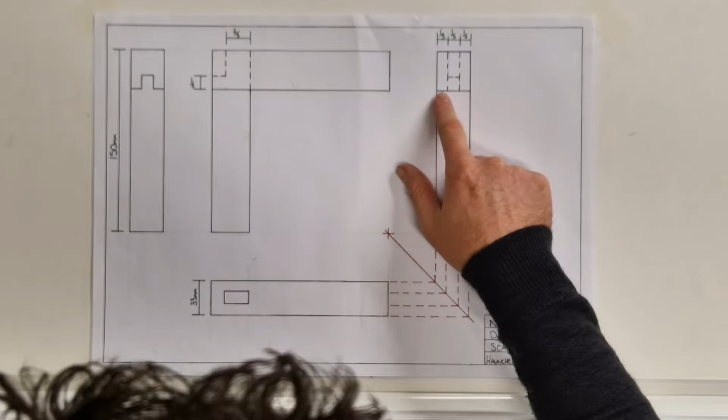So this video is going to be a demonstration on a haunched mortise and tenon. The principles are nearly the same for a haunched mortise and tenon as a standard mortise and tenon, where you usually divide by 3, or you go to the width of your chisel. However, a haunched mortise and tenon is designed for a corner of a joint, i.e. the corner of a door, the corner of a sash window or a box casement window.

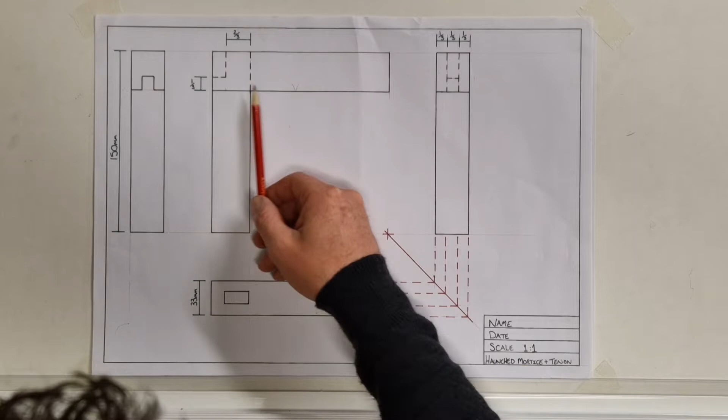So for example, if we just said that this was the corner of a door, then that would be the piece of timber for the door. You'd have a groove usually run out in here, and then the haunch there would usually be the size of the groove, if you're machining. So

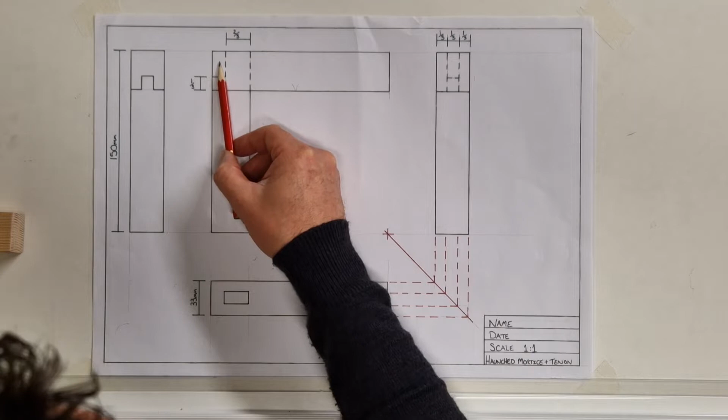the design behind the haunch is the fact that you've got a full tenon coming through for gluing and strength, but then you've also got a small haunch there, which gives you a bit more material on the end to stop it just falling out. So I'll show you how to draw this. For this one, we'll start 20 millimeters in and 20 millimeters down, and we'll make a cross there.

We'll strike a line quite far across on this one because we have to do multiple pieces. So we need to come 33 millimeters this way. And we'll come 150 millimeters down for the joint. And we'll put a mark just there. I'm going to strike a line again, faint, all the way across that board.

What I'm going to do then is come across 30 millimeters, and this is going to be the start of my corner joint, and then that's going to be 44 millimeters in width that way. Again, I'm going to do all this faint for now, and then we'll add it all back in at a later date. So we're going to come across, because our joint size is 150. So all we're going to do first of all is our boxes, and then we'll add everything in afterwards. So we'll come down 44, we'll create a mark, and I'm going to strike another faint line across the top of that one as well.

So again, like in your mortise and tenon, we're going to come 10 millimeters off the one shoulder, 10 millimeters off the other shoulder, which gives us a 13 millimeter tenon. So that's that. And then next, the layout of this joint, where you always use the rationale of divide by 3. So 44 divided by 3 is something like 14.6. We'll round it to 15, okay? So we're going to come in off the end shoulder 15 millimeters, and we're going to come up off the bottom shoulder 15 millimeters. That gives us a third and a third.

Once we've done our thirds lines, these go in dashed lines then. 1, 2, 3. And this dashed line here can be projected across there, and it can also be projected across here. So on this side elevation, we will do our lines going up, and again all these lines on this elevation are dashed because that shows the joint and the cuts,

but it doesn't show it on the face, whereas this side elevation does show it on the face, because as you can see on this joint here, if I turned it, you can actually see the joint, whereas even though the joint is in there, if I turn it that way, you can't see the joint, but it is in there. So again, we'll come in 10 millimeters and 10 millimeters, and these are distinct lines, they're not dashed.

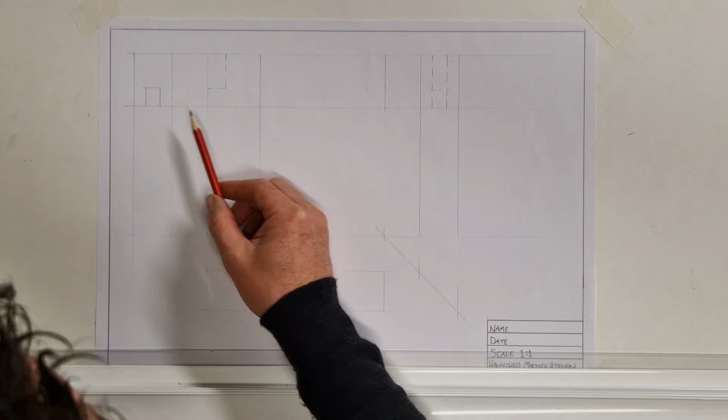Again, if we were going to make an actual door and there was a groove inside here, when we rebate this groove out, either by hand or by machine, we would then do this haunch the same size as that groove, and we just run it out on the same size. It just makes life a little bit easier, and then we can go from there.

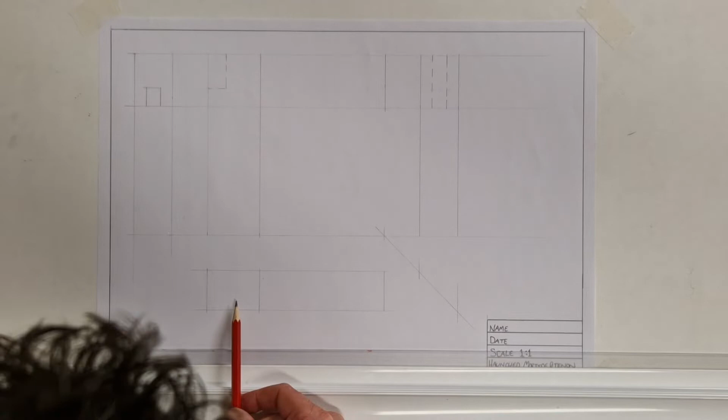So we've shown our front elevation, and that shows the shape of our tenon. It shows the size of our haunch, and it also shows the cut size of our haunch, but the opposite way around. Now what we need to do is show our mortise size on the plan elevation here.

So we've projected our lines, our outside lines down. Now we need to project our tenon lines down, which I will do. And then all our horizontal lines can be met here. So I'll just draw a line faint for now, and a line faint for now.

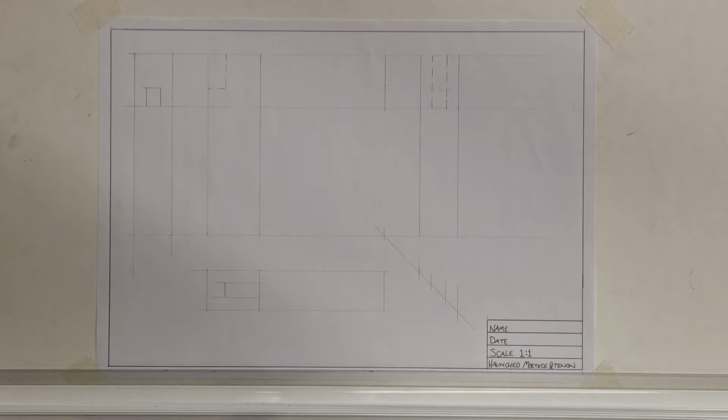Then, where we've come down with all our vertical lines off our front elevation drawing, we also need to do it for this tenon mark here, because our tenon only goes through 2/3 there. So that is our mortise size. What I'll do now is draw it in pen, just to show you distinctive lines.

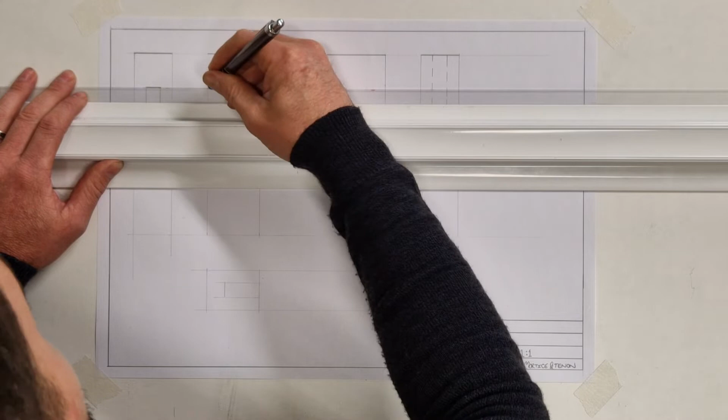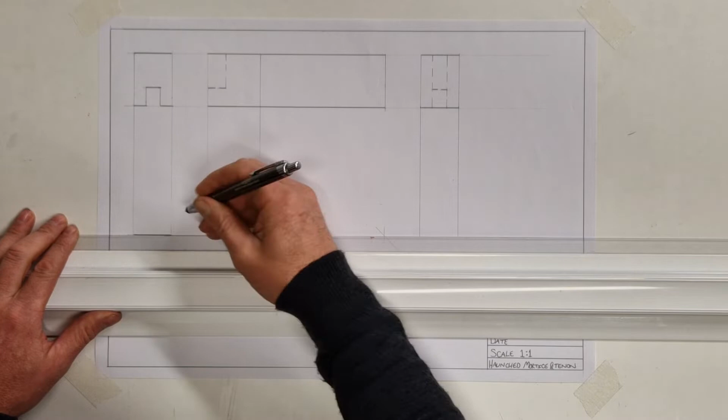Again, these haunches in this joint are for structural integrity. It adds structure to the corner of the job, and therefore adding that little bit in makes the job a lot stronger, and it doesn't just tear out. It doesn't just fall out, because if you did that, it would effectively just be a mortise and tenon with no side, so it could potentially fall out.

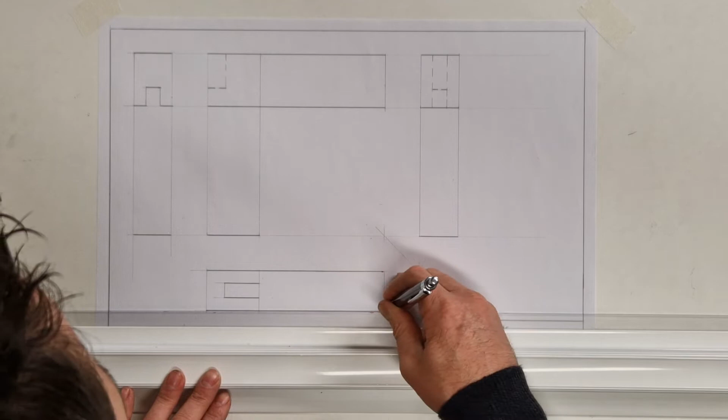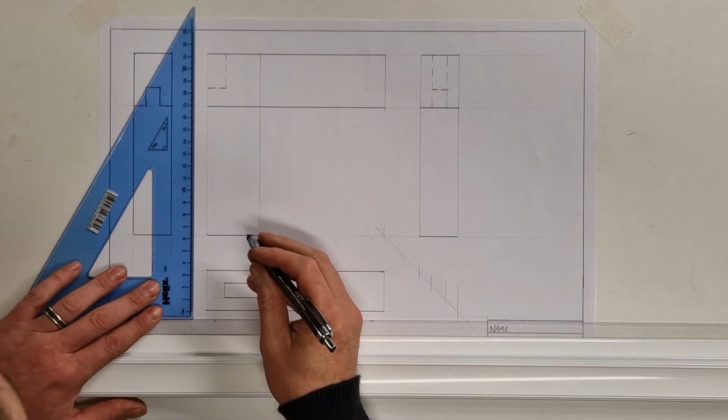Now all the horizontal lines are done, so we'll do all the vertical lines. And again, for this case, we have worked off a 12mm mortise chisel. If you were doing this as a job for a customer, you would work to the size of your mortise chisel on your machines, and they come in all various different sizes.

And again, if you are doing it for a customer, you can do it by hand, that's no problem at all. It just takes a lot longer. But let's say for argument's sake, you were making kitchen cupboard doors. This kitchen cupboard door, if it's a framed panel, would be the same cut and the same tenon, and you may have to do 15 doors. Well, each door has 4 joints, so it's an awful lot of joints.

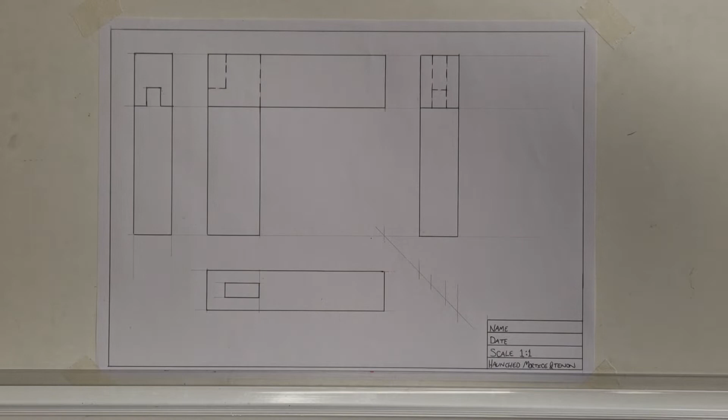Whereas if you do your drawing right and you do it once, then that carries through, and you can make multiple joints repetitively with one drawing. So we'll just put in our 45-degree spring-in line. And I'll do them in dashed lines just to show you.

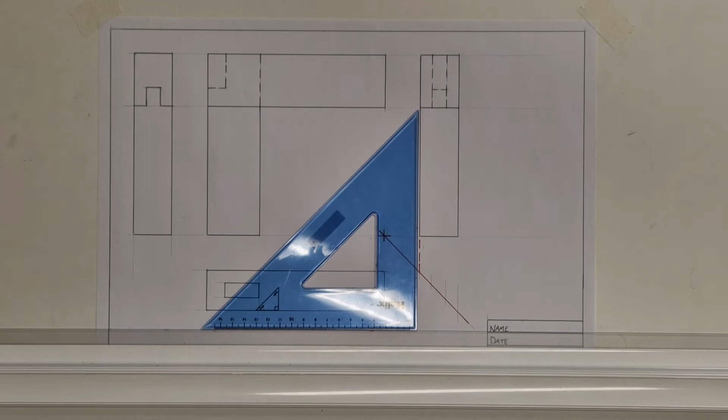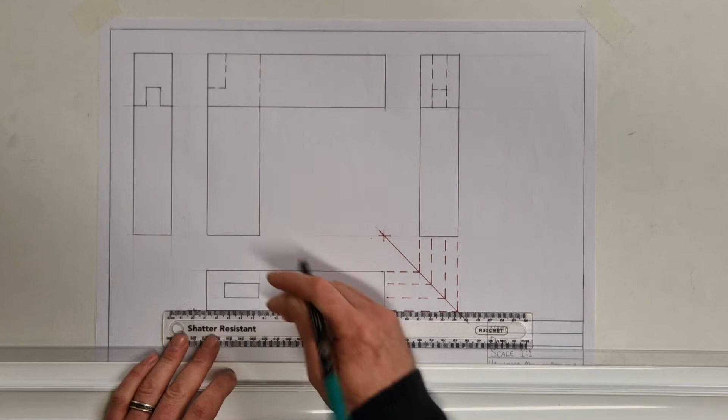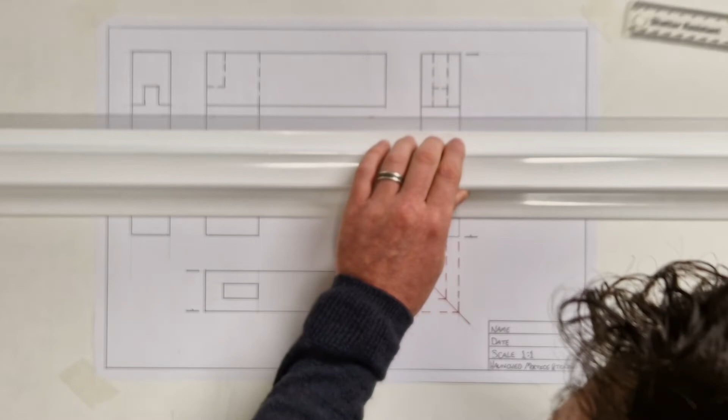And then each one of those lines there for your tenon will come down and show for your mortise. That's that. Next, what we'll do is put our measurement lines in. There's that one. We'll come over here for the 150. There. We'll also come for the 44mm width. There. That's all our verticals.

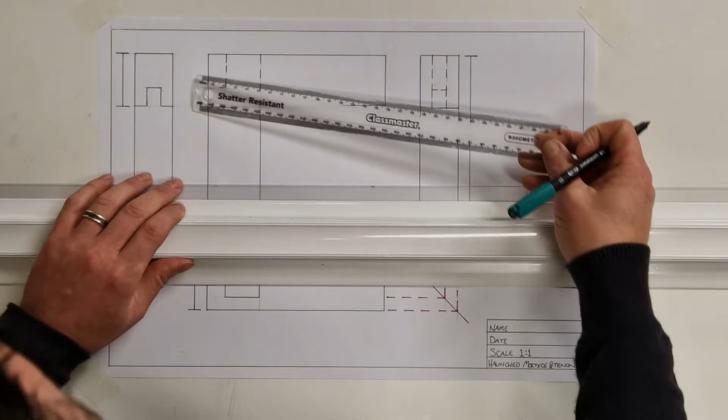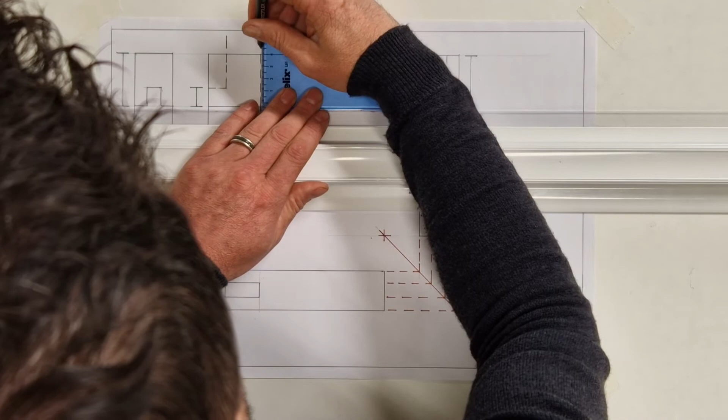We just need to add one more, which shows our third there, and now we can do all our other ones. So for this top section, I'm just going to do this mortise here, and I'm going to indicate it with 2/3 rather than the actual measurements. But over this side, I'm going to do it with the actual measurements, because we're going to the size of the chisel, not a third.

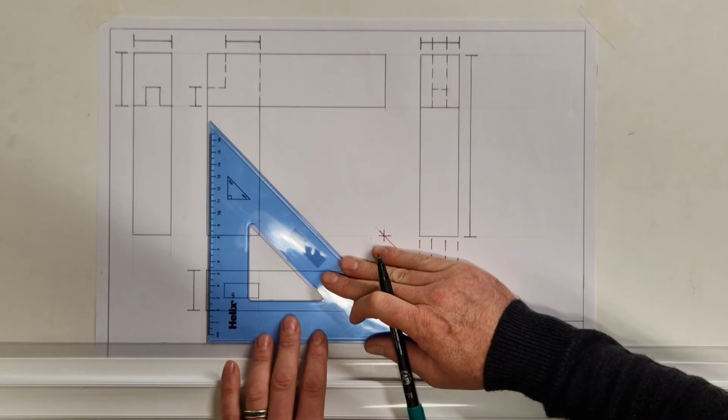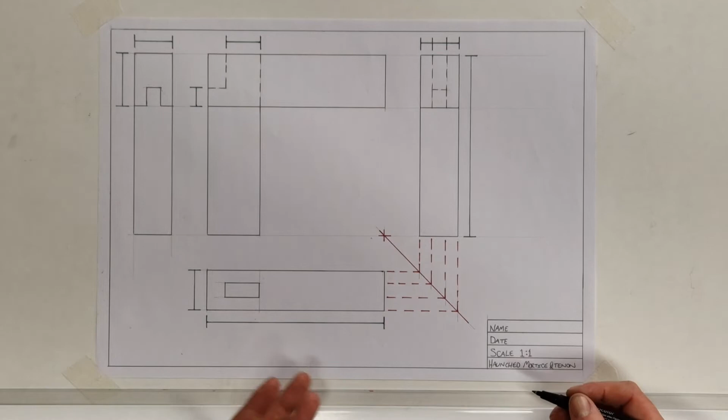So that's our full width, that's a third, and all we need to do then is put the bottom one in, to show the length of our joint. There we go. So we can put all our measurements in from there. So the height of our joint is 150 millimeters. The length of our joint is 150 millimeters. The width is 32 millimeters. The thickness is 44.

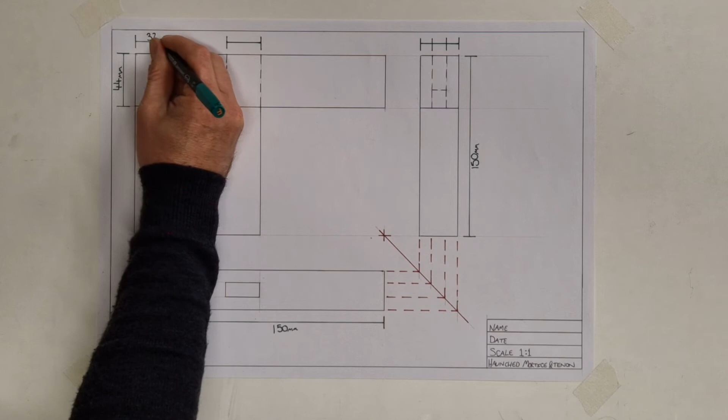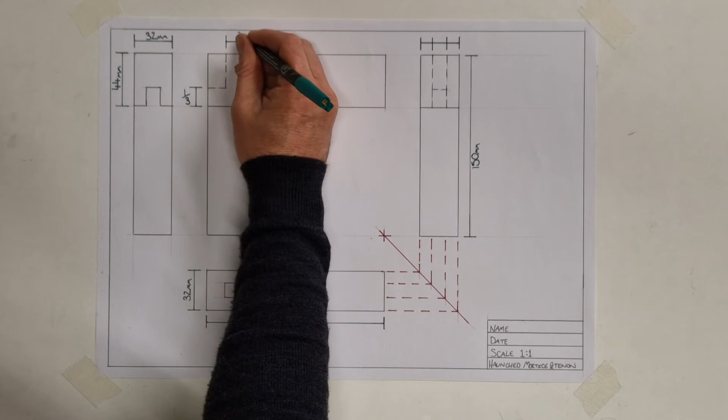Again, this width is 32. So I didn't really have to put that one in because it's already there. However, I have done it. This one here, you can either put the measurement in, or you can put what it needs to be ratio-wise. I'm going to put 1/3, and up this section I'm going to put 2/3. Then over here 10, 12 and 10. So that gives me all the information I need. It shows all sides of the joint.

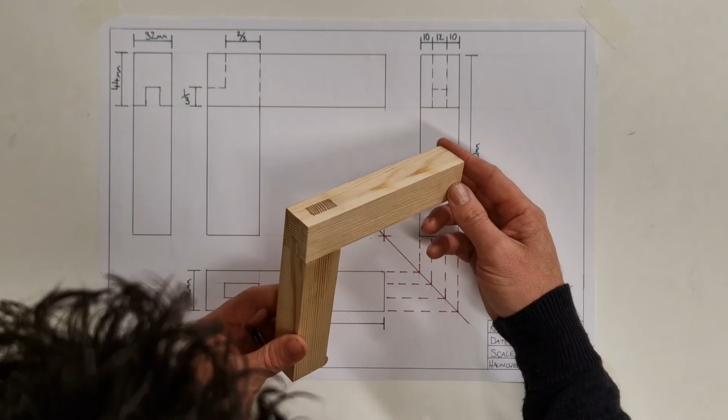So I'll show you with this temporary piece. Obviously the sizes are slightly different. This one here is my front elevation, and that's what it looks like. If I flip it on its side, that shows the haunch on show. That's why there's no dashed lines. If I flip the opposite way, that just shows me this length of timber, this end grain, but it shows me that the joint is inside, so that indicates all dashed lines.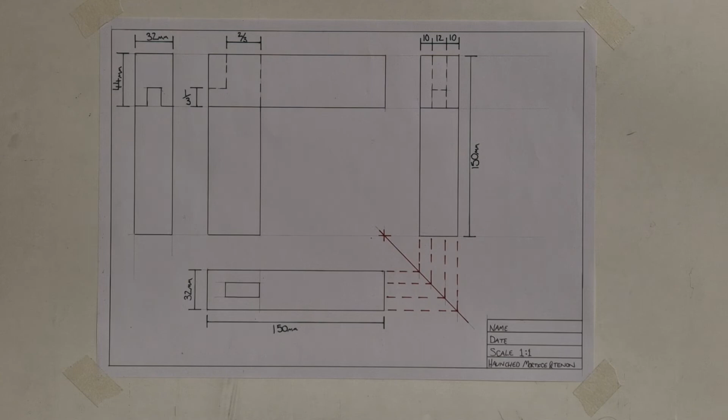We'll go back to the start, and if we flip it so it's a plan view, that's the mortise that we're looking at. It doesn't go right the way through to the end, it's a smaller mortise to take into account for that there. So here are the two pieces of timber. If I took that one away, that shows me what that piece of timber is going to be like. If I flip it, it shows me the mortise, the tenon, and that's the shape of the tenon. That's what we want it to look like.

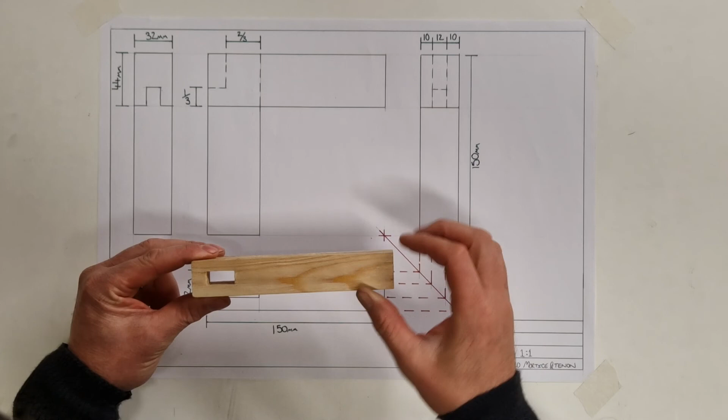Okay. Then if we took the top section and I flipped it, that shows our mortise. But if I flipped it round the other way, it shows the mortise with a little stub on the end.